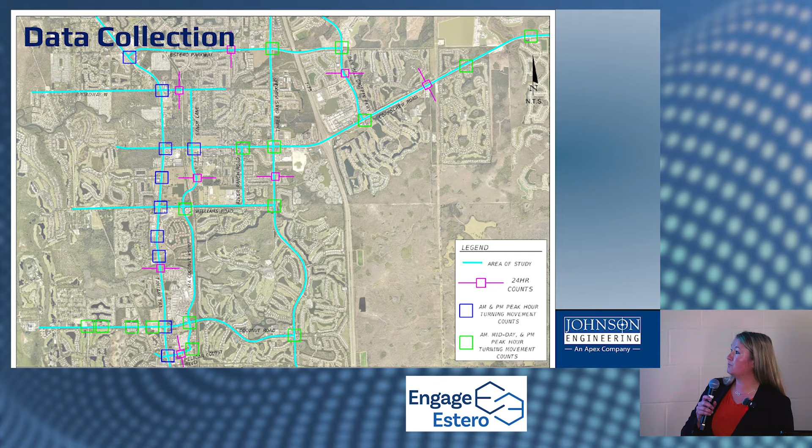This is a quick map of all the data collection done throughout the village. The magenta color shows where there were counts across the roadway, counting for a week at a time, 24 hours a day, to get the overall volumes of the roadway. We also collected turning movement counts to get all the lefts and right turns at all the intersections. The ones in blue were collected in the AM and PM peak hours. And one thing we realized from data over the years is that the village roadways also peak during that noon lunchtime hour, so we collected the green ones at that time frame as well.

So we took a look at the roadway segments throughout the village. We have the 2024 volumes collected in this column—you can see those are currently operating at a level of service B or C. When we apply those growth rates from the previous table to 2034, we have a segment of Williams Road that's anticipated to exceed that capacity.

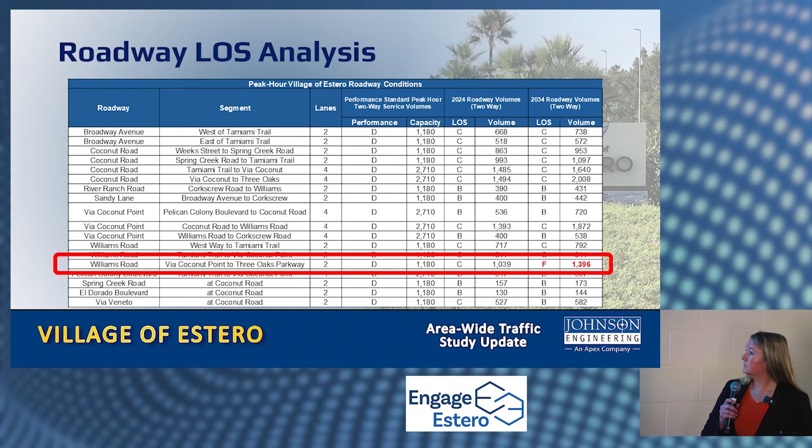We also looked at the intersections, which have an overall level of service based on the delay of vehicles, how long you're sitting there at a traffic light. When the intersection is operating efficiently at a level of service A or B, you're sitting there 10 to 20 seconds or less. Once it starts approaching capacity, approaching E or F, you're sitting there over a minute, maybe multiple light cycles trying to get through that traffic light.

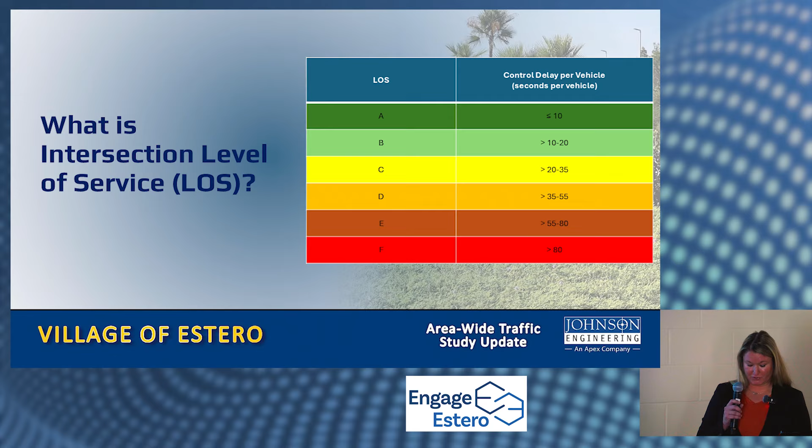So when looking at the intersections, we didn't just look at the overall intersection or the delays as a whole, we also looked at the approaches. There's a lot of traffic, especially along Tamiami Trail and some of the main corridors. Traffic flows heavily in one direction in the morning, then reverses and flows heavily the other direction in the afternoon. So we looked at each approach to help facilitate what can be done to improve the delays currently being observed.

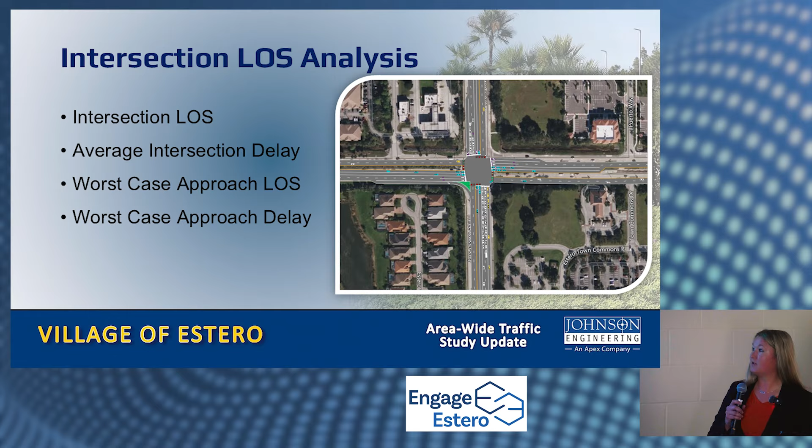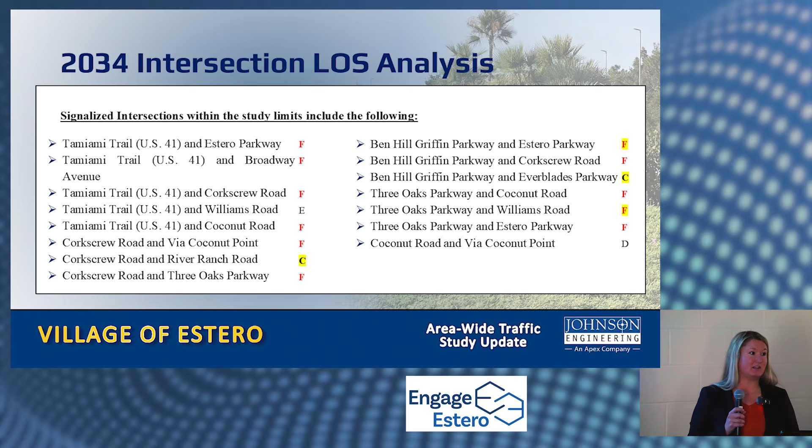We looked at 15 intersections throughout the village. For 2024, you can see the overall level of service, and a lot of those were exceeding the current capacity. When you apply those growth rates to 2034 conditions, a few more come online to exceed the potential capacity of that intersection if no improvements are completed.

We also looked at an additional 15 unsignalized intersections. In the current 2024 conditions, Tamiami Trail and Pelican Sound Drive was the one currently exceeding the delays through there. When you apply to 2034, Tamiami Trail and Pelican Colony Boulevard as well.

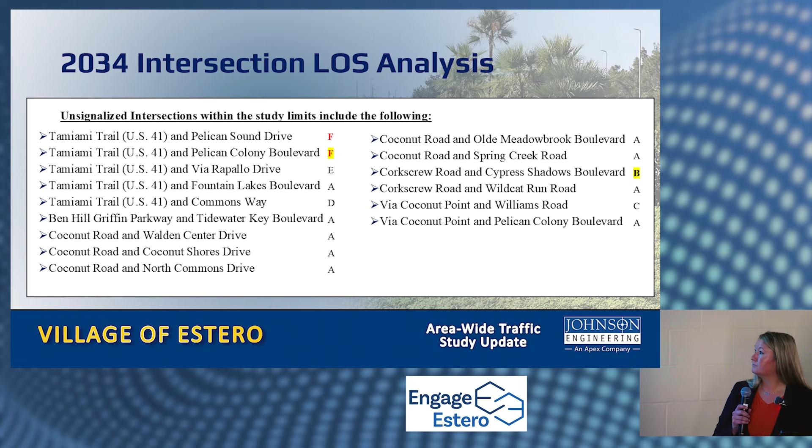As I mentioned, we also looked at crash data. We looked at the past 5 years of crash history at each intersection to see if there's any patterns, anything safety-wise that can be done to help make those intersections safer.

I did want to point out Tamiami Trail and Williams Road. Now, these aren't all the intersections, I just wanted to put up some with the higher frequency of crashes. At Tamiami Trail and Williams Road, over the past 5 years there were 118 crashes, however 3 of those had fatalities. Of those 3 fatalities, 2 were because of left turns coming off Tamiami Trail trying to make it onto Williams Road, crossing that traffic.

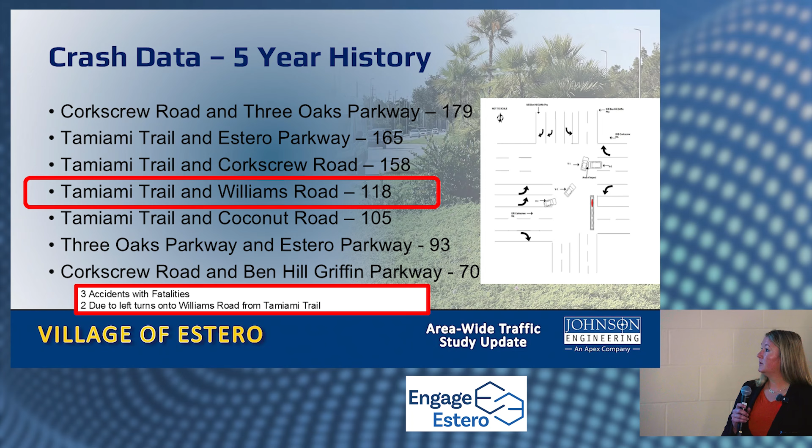So also as part of the study, we looked at multimodal impacts, what improvements can be made to help pedestrians, bicyclists, and other users of the roadway to make those safer.

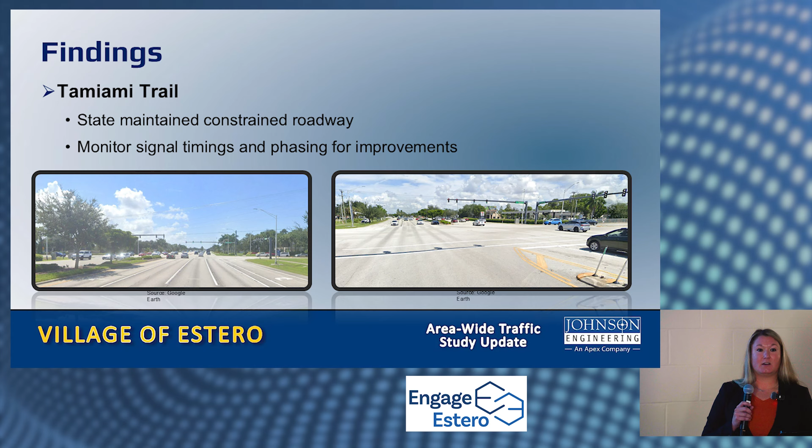Some of those initial findings: Tamiami Trail is a state-maintained roadway and it is in a constrained condition, built right-of-way to right-of-way. So the main improvements there are signal timing, looking at the phasing, retimings, to help facilitate the flows going up and down Tamiami Trail.

Williams Road, that was the one segment I mentioned, it's exceeding capacity and without improvements could potentially continue to exceed the capacity of the roadway. Some recommendations there include potential turn lane additions onto Three Oaks Parkway to help facilitate that movement, potential 2 to 4 lane widening, and a roundabout at the River Ranch Road intersection.

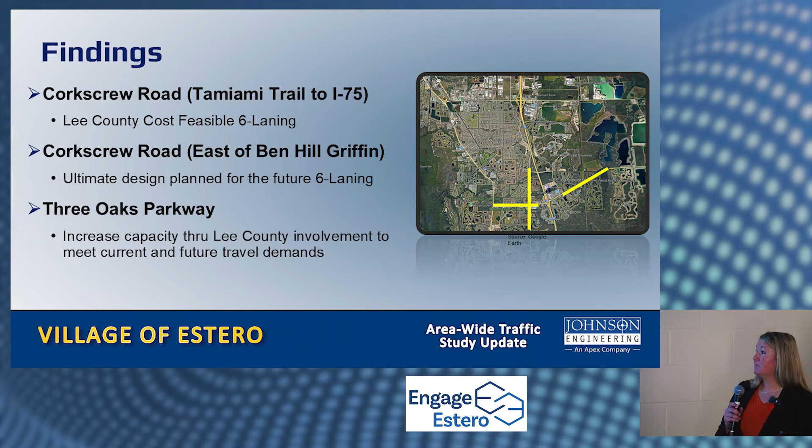Corkscrew Road and Three Oaks Parkway are Lee County maintained roadways. Corkscrew from Tamiami Trail to I-75 is on the Lee County cost feasible plan for future 6-laning. Corkscrew Road east of Ben Hill just finished construction for the 4-laning, and that design was set up for future 6-laning so they can add those additional 2 lanes. At Three Oaks Parkway, in order to increase capacity there, there will have to be some Lee County involvement to meet future travel demands.

Looking at some of the intersections, Tamiami Trail and Estero Parkway, the turn lanes on Estero Parkway are currently insufficient in length. One recommendation was to close the left turn into Walmart, which will allow for the lengthening of those left turn lanes off of Estero onto Tamiami Trail.

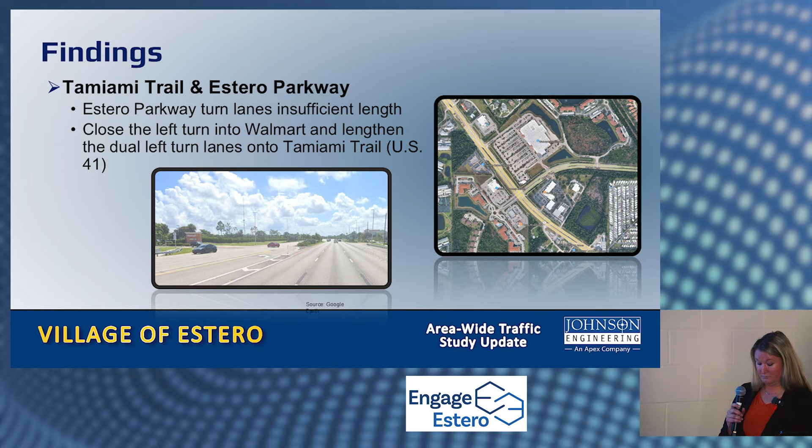Tamiami Trail and Williams Road, as I mentioned, this was the intersection with some fatalities. So to make that a safer intersection, we considered making those left turns protected and not allowing that permitted phase across oncoming traffic, and then adding an exclusive westbound right turn lane for getting onto Tamiami Trail.

Tamiami Trail and Pelican Colony, the installation of the traffic signal will help alleviate some of the delays that are going on and safety concerns as well, which I'll touch on more here in a little bit.

Tamiami Trail and Coconut Road, extending the westbound left turn lane to get additional capacity for cars that are currently queuing. Some of the queue will exceed the capacity of the existing turn lane, which will impede through traffic as well. That future Pelican Colony traffic signal may help alleviate some of that, because currently there's traffic heading up to that intersection to utilize that light. So once the light is there at Pelican Colony, that'll subsequently help this as well.

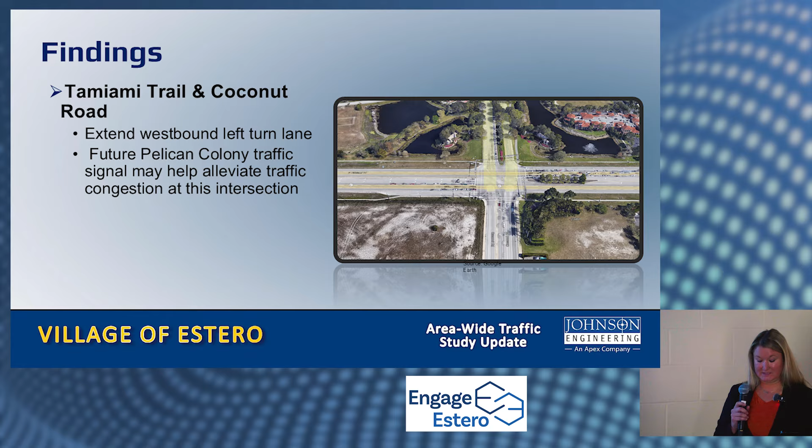Corkscrew Road and via Coconut Point, southbound turn lane improvements to help increase the capacity through there.

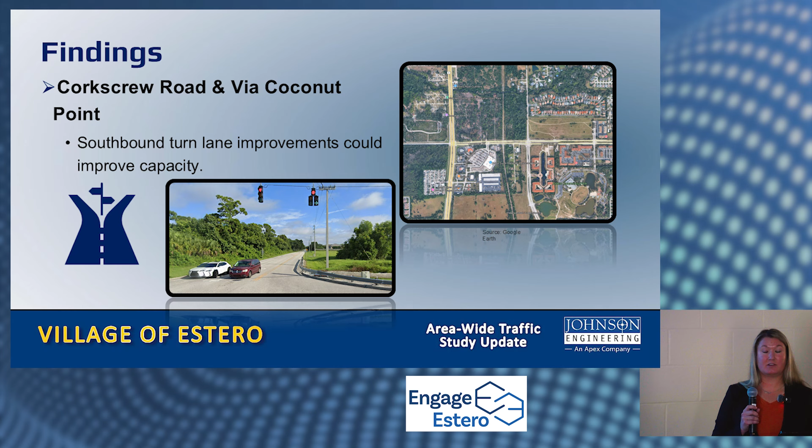Tamiami Trail and Pelican Sound Drive. In the interim condition, something that's a little easier to implement is modifying that intersection to a right in, right out. Right now there's a lot of traffic that tries to make it all the way across 41 there, which increases those crash risks. And then a potential future traffic signal with all the development occurring to the east.

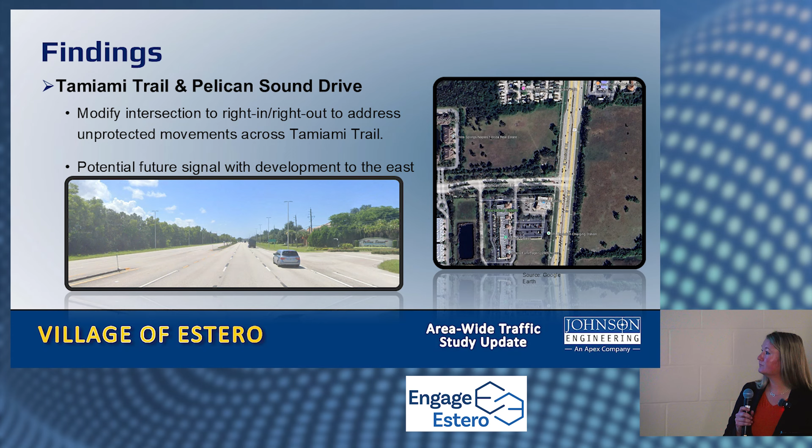Tamiami Trail and via Rapallo Drive, we recommend completing a signal warrant analysis for that, and we are working with the village right now on getting contracts going for looking at these intersections and potential signals.

So where do we go from here, looking at all these findings and what's going on? We took all these potential recommendations and listed them on a scale of high priority, medium priority, low priority. The higher priority ones are those that have not only operational benefits, but safety benefits as well.

So for those higher priority improvements: Tamiami Trail and Williams Road, getting those protected left turns in there. The more we can reduce the risk of crashes, the safer that intersection. And then adding that exclusive westbound right turn lane to help increase capacity as well. So that one has not only the safety aspect, but the operational aspect too.

Tamiami Trail and Coconut Road, eastbound and westbound left turn lane improvements, which would be done along with coordination for that future Woodfield development as well. And the addition of the traffic signal at Pelican Colony, which is currently in permitting stages, will also help alleviate some of the congestion occurring at Coconut.

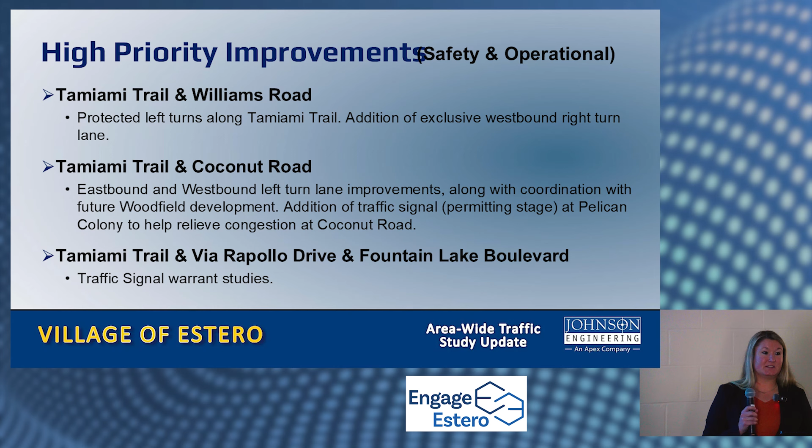And as I mentioned, Tamiami Trail at via Rapallo and Fountain Lake, traffic signal warrant studies. We're working on contracts right now with the village for that.

The medium priority improvements: Tamiami Trail and Estero Parkway, increasing that westbound left turn lane, which would essentially close that turn lane into Walmart. Right now there's a lot of conflicting movements, with cars backing up at that westbound left turn lane and cars also trying to cut through and get across into Walmart.

Tamiami Trail and Corkscrew Road, modifying the westbound approach to a dual left turn lane with a single through lane and an exclusive right turn lane, and adding a secondary right turn lane for the eastbound movement as well.

And as I mentioned about signal timing, we put that in medium priority just because it's easily implemented. Any of them along the state roadway, FDOT and Lee County work together to take a look at those timings. There are lots of phasing plans, and they're constantly modifying those. The ones within the village, Lee County also maintains and modifies those timings as needed.

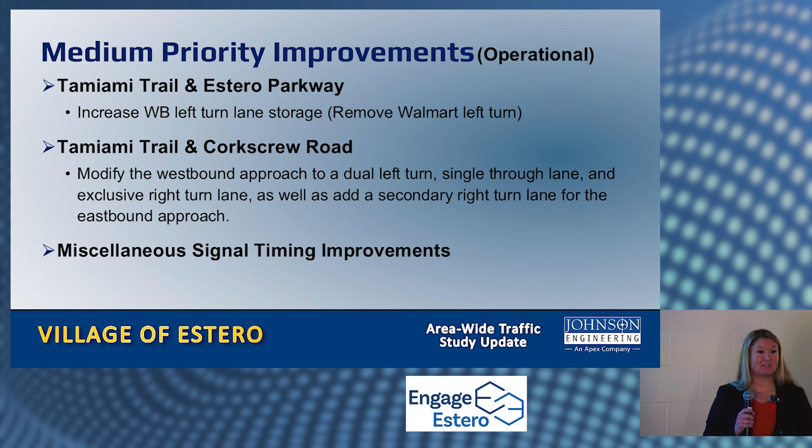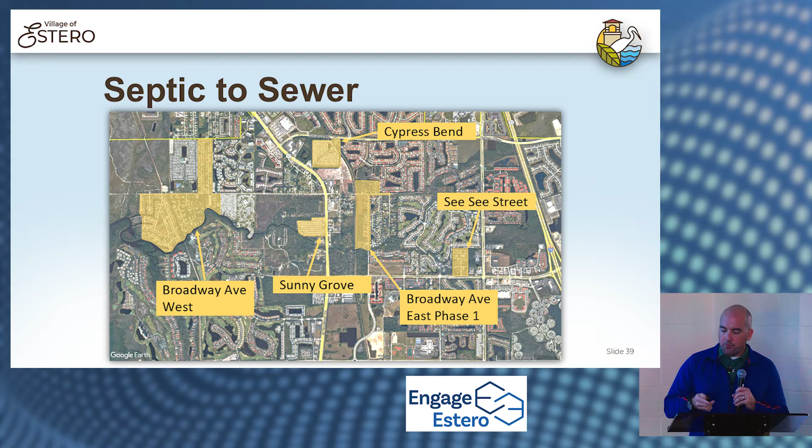Then there are a few projects that we've started - we started the design, but they currently don't have any grant funding for. So construction is not imminent on these projects. But once these are finished, we'll basically have almost all of the septic tanks offline. The reason these are a little bit further out than the others is they're not expected to have the cost-benefit ratio that the other ones would.

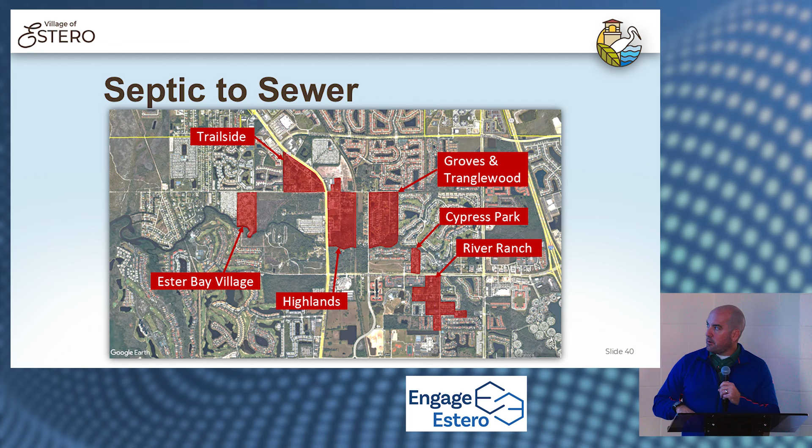Some of the other ones are more densely populated, so the cost is a little lower per home, and they're generally a little closer to the river than these are. So a little more detail about these projects. We're waiting on potential federal funding that would allow the grants to cover most of the cost for all of that development and allow the village to do Sherrill and Ludich Lane, which currently we don't have funding for.

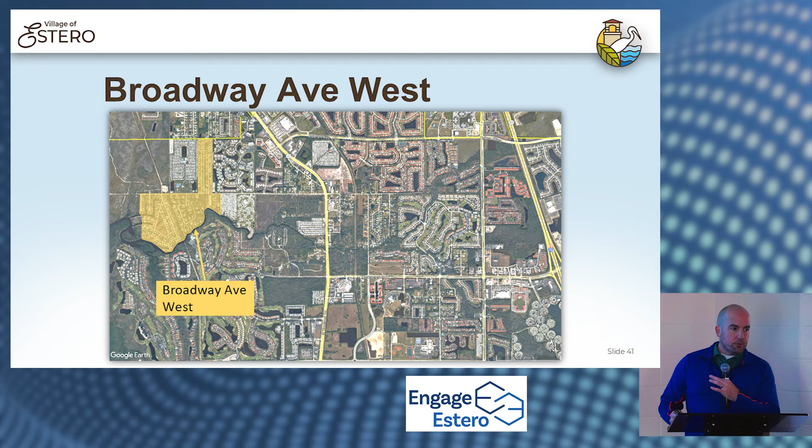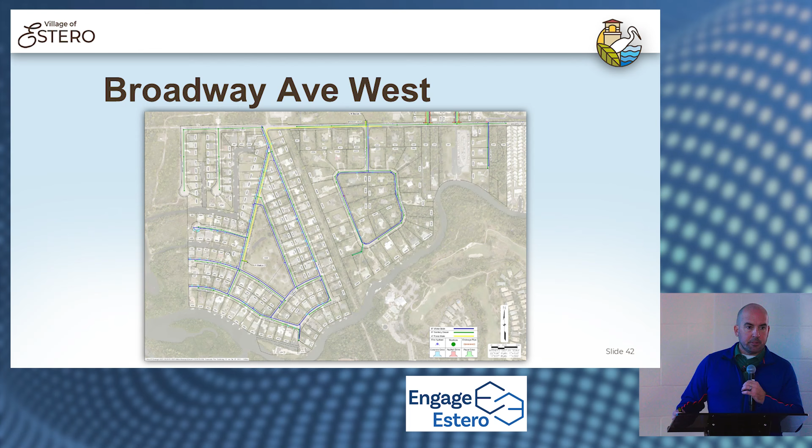And that's basically just water lines and sewer lines. It would be two lift stations, and we get all of those properties off of septic. And then this is Sherrill and Ludich. This one's a little more complicated than the rest because if you go out there right now, there actually is no road.

It's a dirt road that is washed out. What this would allow us to do is actually build a road with the utilities. So they would have swales, asphalt. Their roadway would look like all the other roadways within the village.

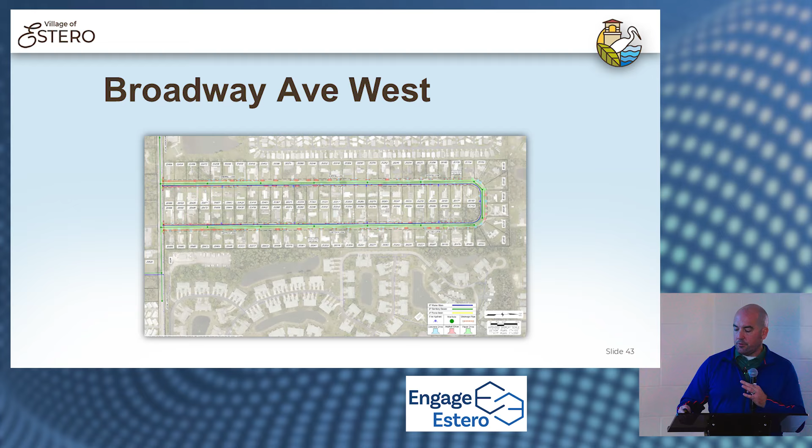It'd be a huge improvement to this area, but we really need the grant funding to do that. This is why we already have $7.4 million. If we get the federal grant, it's another $16.5 million, so that's a huge amount of money to go toward that project.

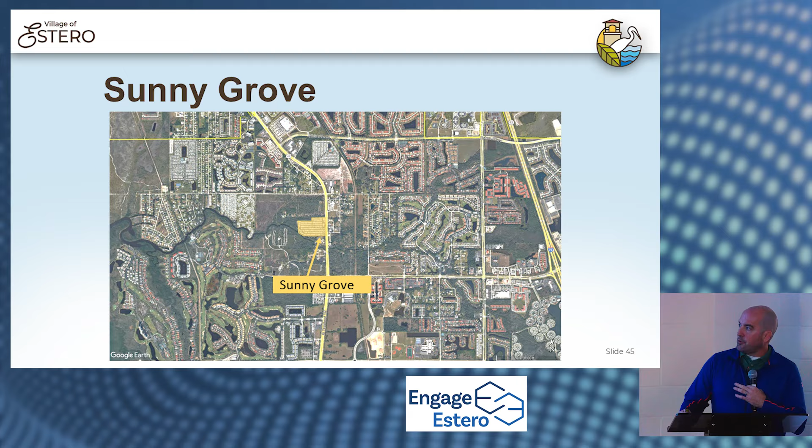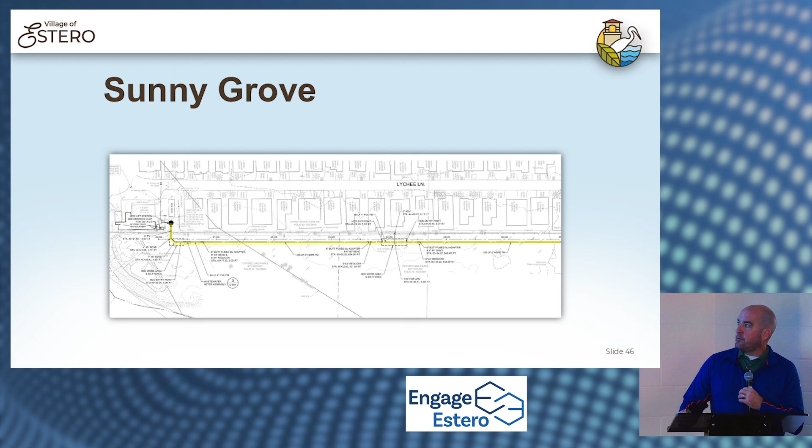Sunny Grove, the one that's under construction along 41 - this is relatively simple because they already have the gravity sewer in, so we just need a lift station and force main. But the complicating factor is the existing force main is all the way over at Corkscrew Road, so we actually had to directionally drill a force main under the river. That's already installed.

Excuse me, before we get too far in, can we go back to the Broadway West federal funding? Was that funding changed with the new administration? We don't know that answer. Unfortunately, it's been delayed many, many times, and I think you've definitely hit on a fear, that maybe that goes away. We don't know.

We don't have the grant agreement yet. We've kind of made baby steps going forward. Just before the shutdown, we got notification that we needed to do a public notice and allow public comment on that potential grant. We finished that, I think, during the shutdown, and then we really haven't heard much since then.

So if that does not come through, what'll happen is that Sherrill and Ludich will not move forward, and the assessments associated with the rest of it will be significantly higher than it would have been otherwise.

Any estimate as we stand today? We don't. Those projects haven't gone out to bid until we get the grants and move forward, because that bid's only going to be ready, valid for a month or two.

So if we don't have any bids, is there really no timeline for the project to move forward? Well, it's not the bids that is holding it up, it's the grant. So we're working with a construction manager to try to get it expedited. But until that grant is secured, there's not really a reason to do the next step.

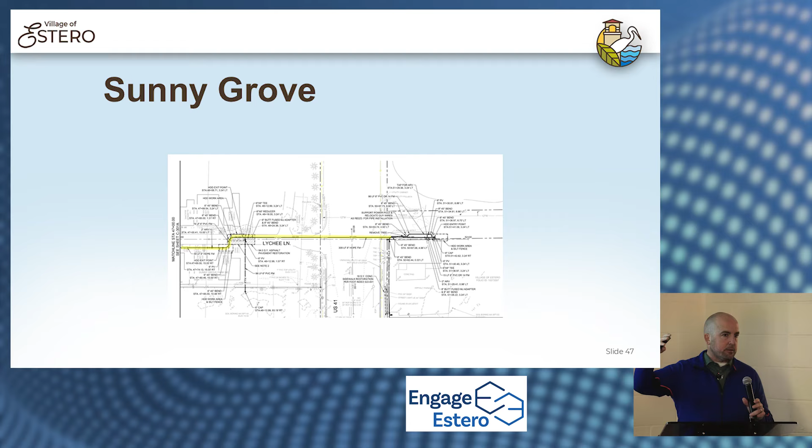Normally, if we did not have the HMGP, we would be trying to compete with money with every other community that's trying to do the septic to sewer. And we did that previously, and because of where we're located and the potential impact, and that we're not a disadvantaged community, meaning it's fairly affluent, we don't compete well for the money in those situations. So this is a unique place where we're able to get potentially a lot of money that is going to significantly reduce the cost to the residents. The only reason we're waiting, if we didn't have that unique opportunity, we would probably be moving forward and the residents would be paying a lot of money for this. So that's why we're waiting, it's because it's such a large dollar amount.

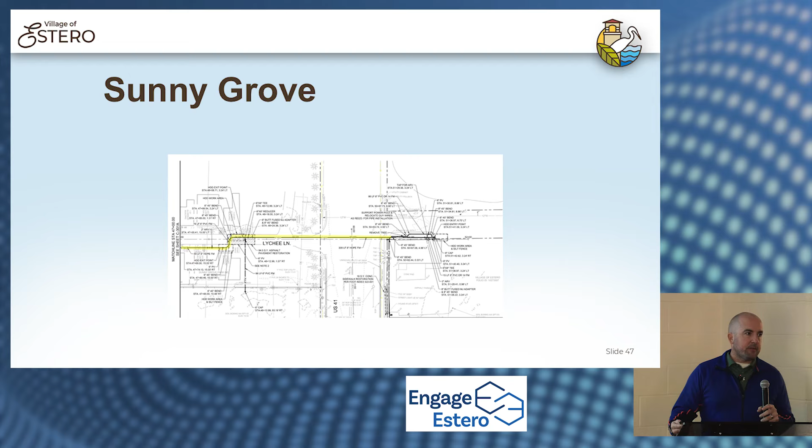Is there a possibility that they come back and only give half, a quarter, a third? On the HMGP, I believe we're past that point. They could do whatever they want, but it would probably be they wouldn't give it to us, or we get that number. Likely.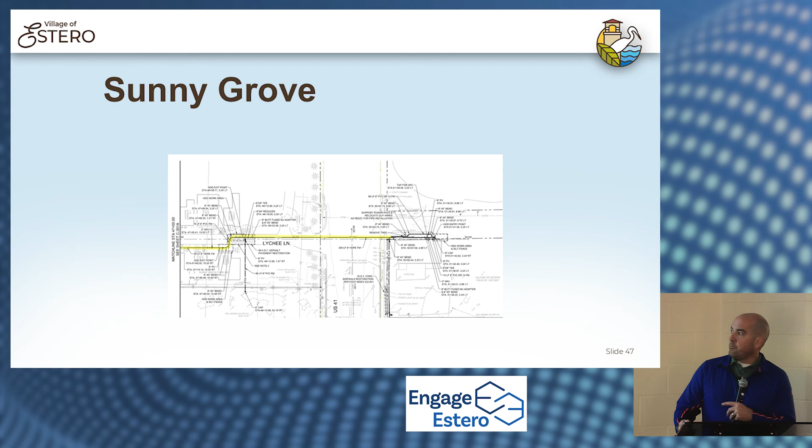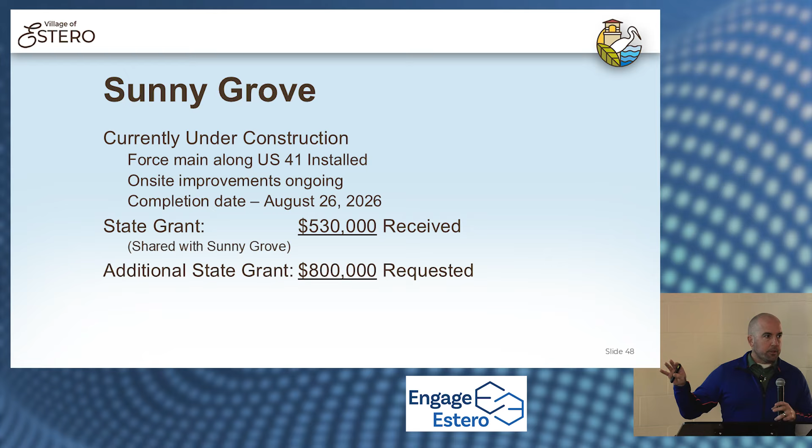So here's Sunny Grove, we talked about that a little bit. There is a state grant there that we already have, but it's shared between Sunny Grove and Cypress Bend. We've asked for another grant this year. I'm not sure that's likely going to happen, to try to offset those costs.

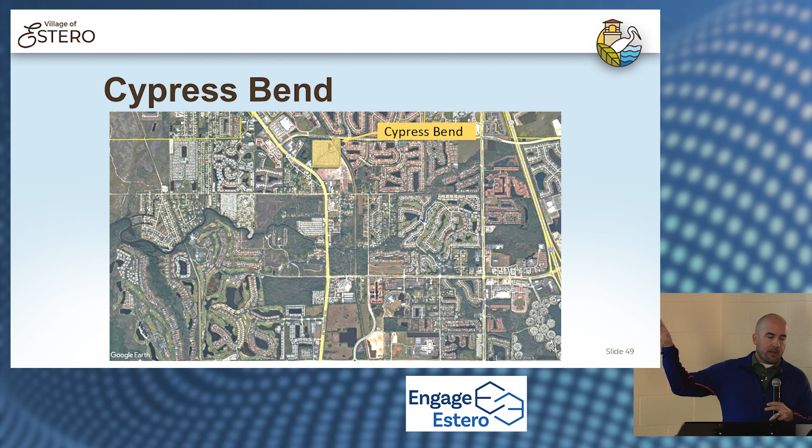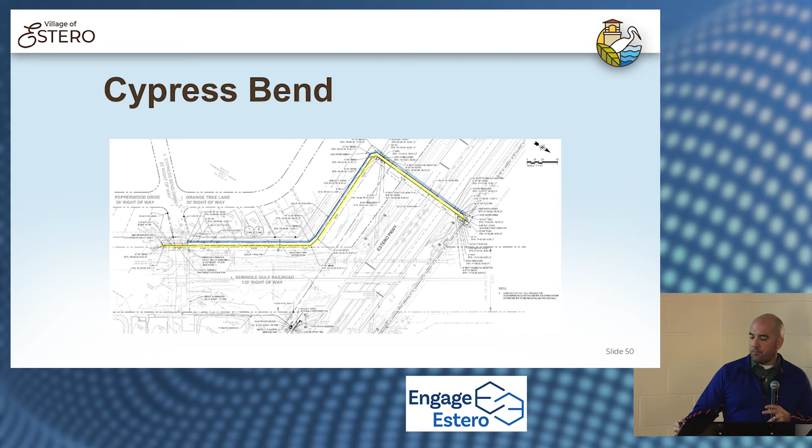Cypress Bend, that one's in a little bit better situation because it's so close to the existing force main, so their total cost is lower, and then they have a lot more residents to split it, so their cost per resident is a lot lower. That's their whole connection, so it's a lot simpler than what Sunny Grove is. And completion in July, that's everything completed. That means the connections are made and the treatment plant is offline.

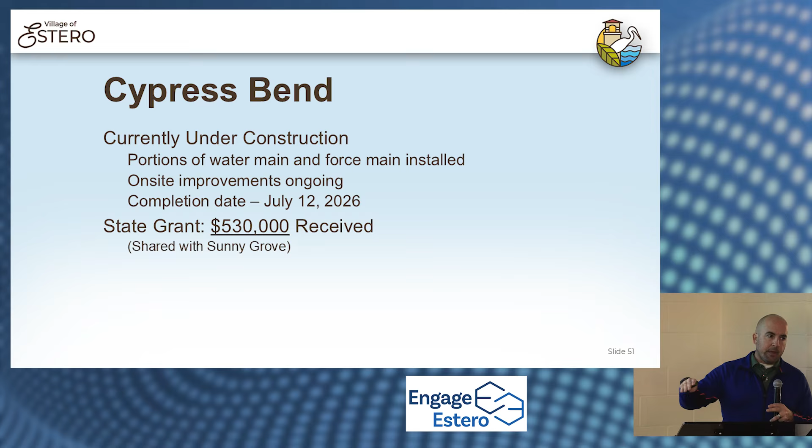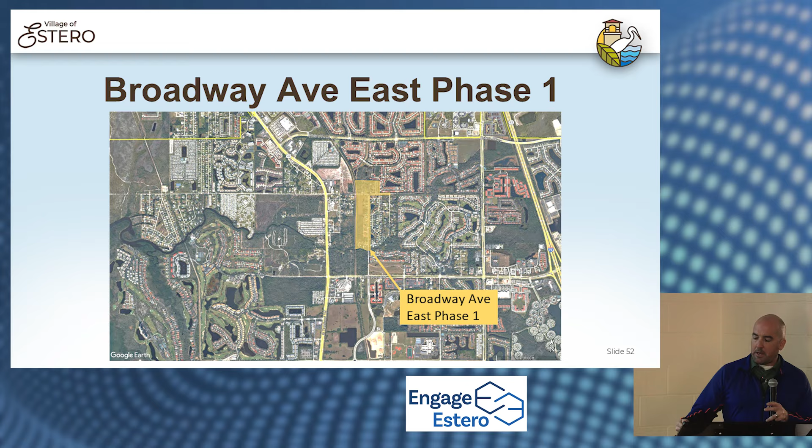And then this is one that we're working on right now. We got a grant last year, and this is the first phase of Broadway Avenue East. This is just the lift station, the improvements along Sandy Lane and Broadway. It does not include any of the other side streets, those would have to happen later. And that just shows that it's just on Sandy Lane and Broadway.

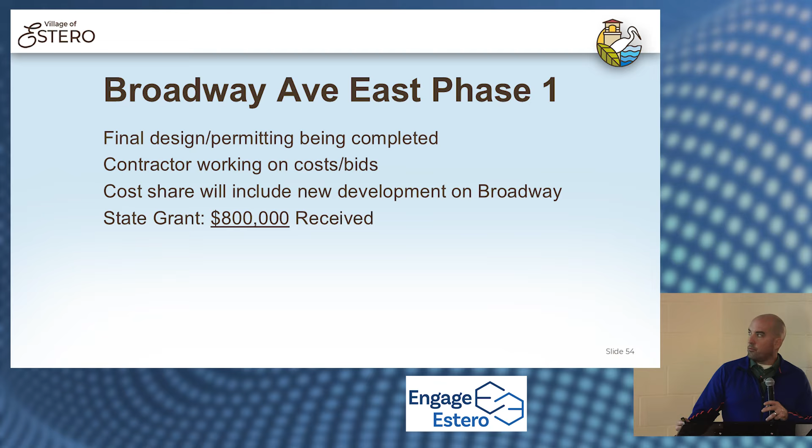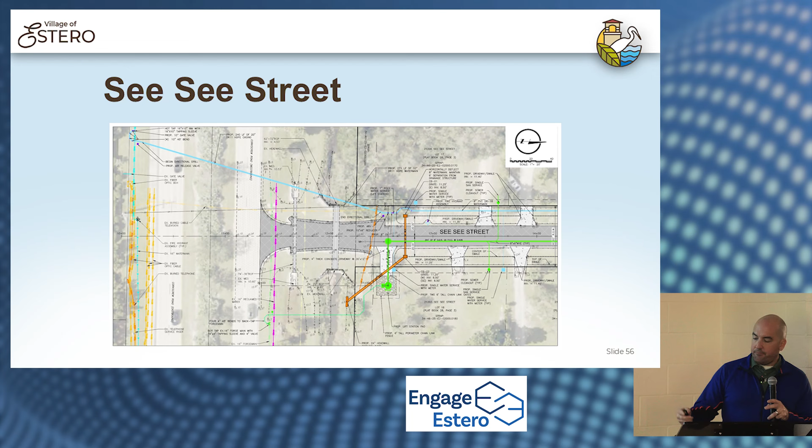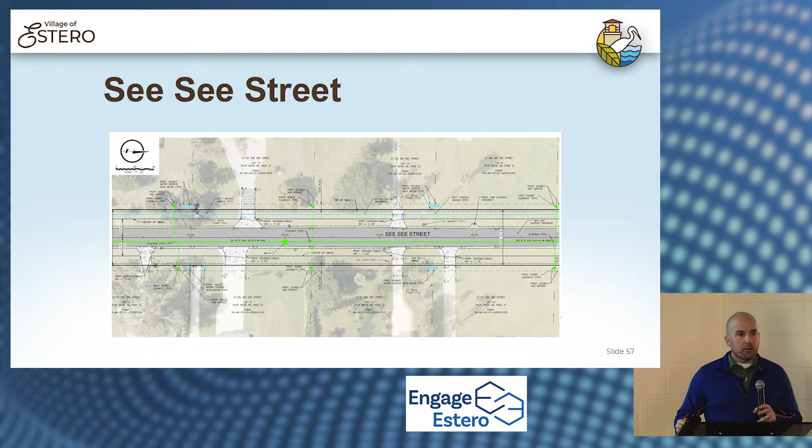$800,000 grant, we're moving forward with construction on this. And then See See Street, similar to Broadway, we got an $800,000 grant for that. Moving forward, we have the design finished. We are revising it just a little bit to try to bring down the cost some. The contractor reviewed the plans and came up with some ideas that we might be able to make it a little bit cheaper. So the engineer's working on that, and then they're going to give us the cost again, and then we'll get back with the residents to tell them what that cost is. The cost was, I think, 50% higher than what we thought it should be, so we think we'll be able to get that down and make it a little bit more reasonable for the village and the residents.

And then, we went through a lot of questions, but are there any more real quickly? No, I was going to say that. I have two questions, if I may.

There will be no utility work on Cheryl and Ludich. Yes, generally. That's another reason we want to wait for that grant, because that, I mean, it's transformational for that area.

Yep. My other question was, I thought I heard you say that the construction design has not been done for Broadway West up to, so, Cross? So the utility design is done, but there's actually two projects. One is the utility design, which is kind of what we're talking about here, but we actually got a grant, a different federal grant, that is to redesign the actual roadway, the Broadway roadway, which will get rid of some of the deep swales and things like that, make it a safer road. Okay, but you're not widening.

We're from Riverwoods, and we had given the easement to put the lift station on our property. And with the construction of the road, will that impact our entrance property or any of? So with Riverwoods, I think the only thing that it might impact is fixing your turn lane, because your turn lane is not a standard turn lane, it's like half the size that it should be, and so it would be those type of things to improve the safety. But we won't lose?

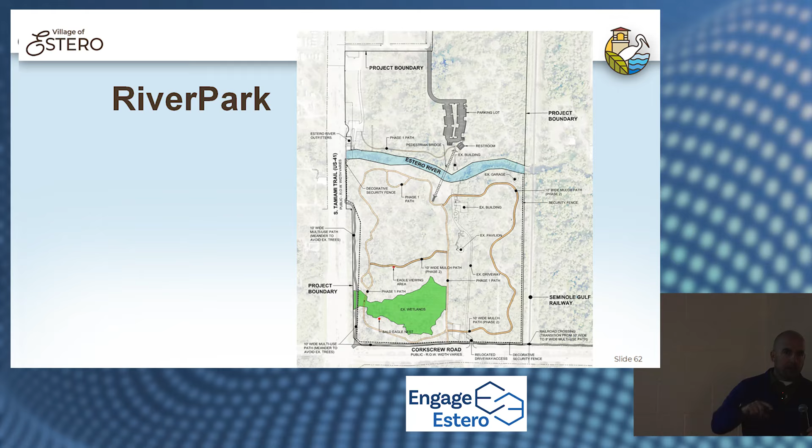So just a quick update, the River Park, the land on Corkscrew Road and US 41, that is moving forward. The contractor's a little bit behind schedule. It was supposed to be finished in November. Now it looks like it'll be more January is when it'll be finished. But they have made some progress. It was exciting - on Tuesday I was out on site most of the day because they actually installed the bridge over the river. So if you paddle the river today or whenever, you'll actually see a pedestrian bridge over it. It looks really good.

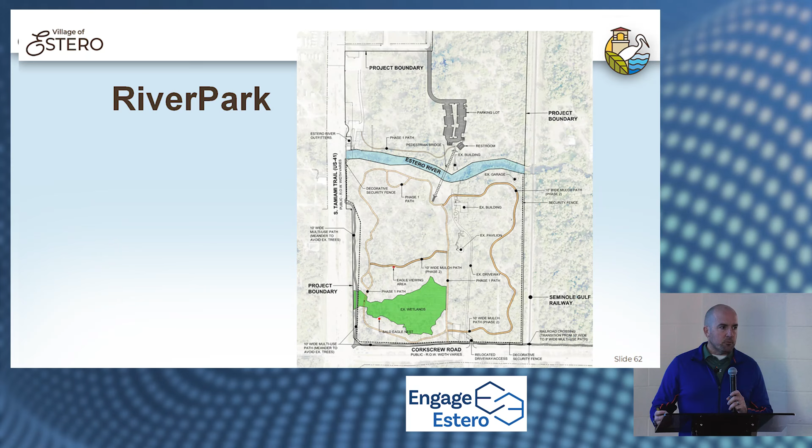It's decorative, it's like 12 or 13 feet wide, so it's going to be nice going back and forth across the river. Just to go through what the park is, this is kind of the master plan of what we're doing in the first two phases. We'll have a restroom and parking on the north side, the bridge across the river, and then there'll be trails on the south side. There is an eagle's nest there.

The eagles are back this year. I haven't personally seen them, but we have an ecologist that monitors, and she sent us a picture of them about two weeks ago. So they are back, they've been there for at least three years. They have had offspring that have fledged, so it has been successful. But what that means is there's certain areas of the site that we're not able to use while they're nesting. So what you see here with the two green circles is that inner circle is 330 feet from the nest.

Generally during nesting season, which is October to June, you can't be in that area. Nobody can be in that area. Those trails will be closed during that period. But the rest of the trails are available. We just have to stay out of that area.

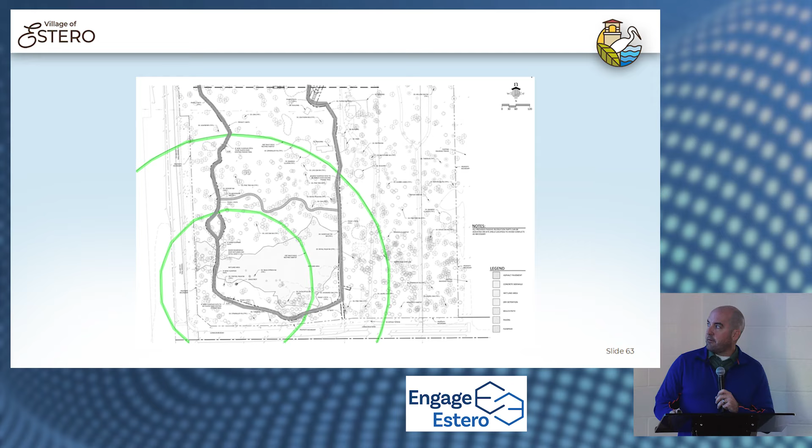This is the site plan. Originally, we had a path that was going to go to the Estero River Outfitters. The Outfitters was not comfortable with that path, so we went ahead and deleted it. The only reason it was there was to benefit them, and if they didn't want it, then for the short term, we got rid of that.

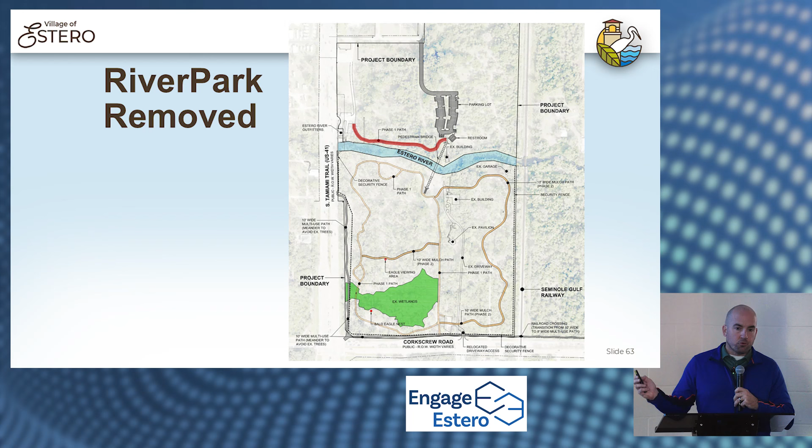We're working on the design for phase 2, which will almost double the amount of trails. That'll go all the way over to the railroad. If the BERT ever happens, the BERT would be able to connect into these trails at some point in the future if that were to happen. And then with that, any questions?

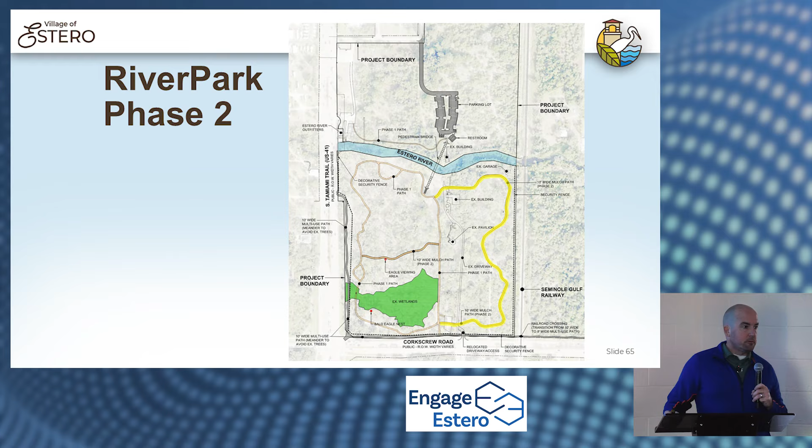Is there a gopher tortoise habitat on the property? So are you asking if there's gopher tortoises on the property? Yes. And generally they're on the north side. There are not, I don't even know if there are any on the south side. I mean, if you mean habitat in that there's a preserve, no. Is there gopher tortoises there because they like that area? Yes.

Okay, well again David, thank you so much. I appreciate all you've done today, and it's certainly been very enlightening on those two projects. So I appreciate it very much.

Oh, did you walk over? Oh no, it's here. Well, I don't have a great deal more to cover for you, but there is actually...

Something which maybe Steve and even David here may not have come across: just yesterday I received an update because I've been trying to get exactly what's going on and what the timeline is on the I-75 expansion. I know many people here in Estero are very concerned, especially those who live close to I-75, about potential road noise. Engage Estero has been very engaged in that issue, providing a lot of information to the Florida Department of Transportation from our perspective, helping the Brooks communities and others who've been very concerned.